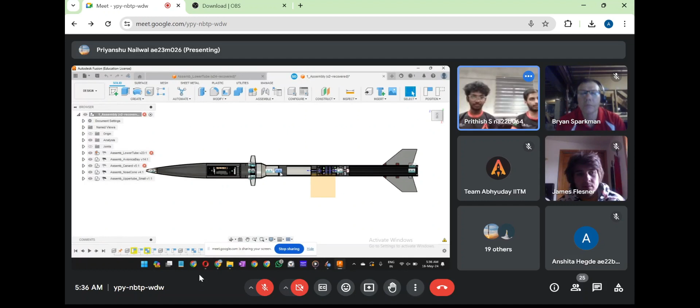So this is the cross-sectional view of this year's rocket, Chetak 2. As you can see, this time we are going with a minimum diameter at the cross section. Our payload takes a 16 centimeter diameter tube. It's a standard 3U CubeSat design, but the casing was thinner than that, so we decided to go with a thinner diameter to save weight, in which we succeeded. Another aspect we're working on is the canard system, so I'll brief you from the top of it.

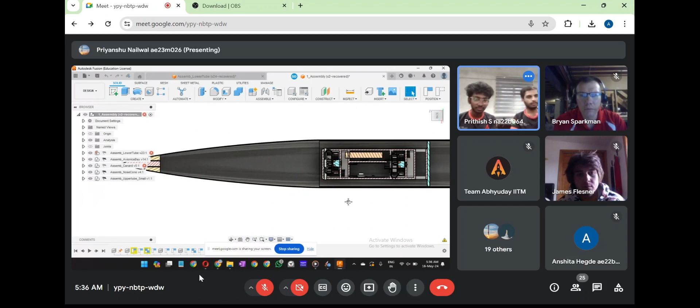Based on previous year experience, we went with an aluminum nose cone tip basic mechanism. The nose cone is a von Karman shape, with the fineness ratio set to 4 this year to reduce drag as much as possible. We decided to go with a carbon fiber nose cone; our nose cone and fins are both manufactured out of carbon fiber.

Our payload will be secured on a particular bulkhead, which will be fastened with the tubes. Below that comes a canard system, actually one of the most unique aspects of our rocket this year. The reason why we have a canard system is our last year's experience, so my teammate Prithish will explain more about it.

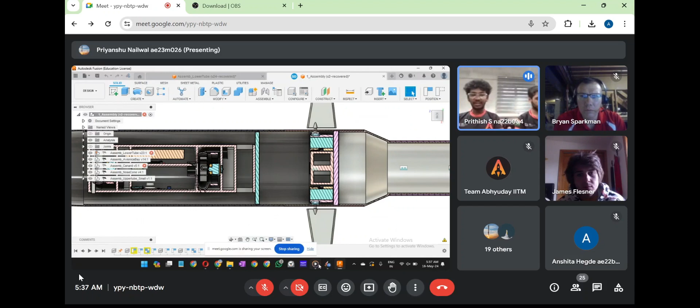So we thought of introducing aerodynamic roll control, for which we designed the canard system. It's just roll control. It's not doing any attitude, it's not doing any altitude, and it's not doing any guidance. It's just basic roll control.

The canards are basically flat plates with tapered off edges, positioned right before the transition so that there's no flow separation happening there.

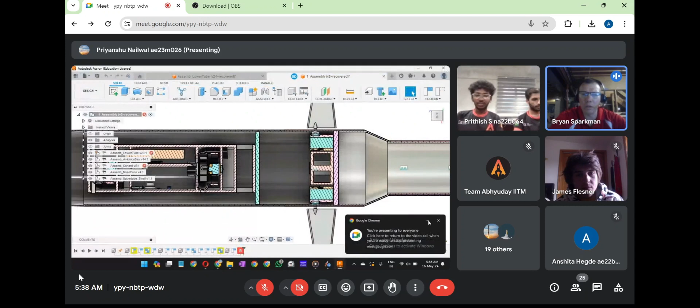Have you been able to test it at all? Have you put it in a wind tunnel or done any sort of testing, because I'm assuming you've done this with microcontrollers and servos.

Yes, but we haven't been able to test it yet because there's a small problem with the attachment of the canard that we are currently working on. The canards are ready, but once the attachment issue is sorted in a couple of days, we'll be able to test it out.

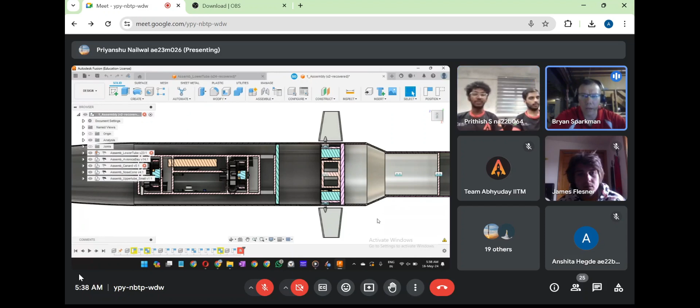That'll be something to cover in depth when you get out there, because we'll want to make sure those canards do what we expect and don't make the rocket go off the intended path. Especially if you're still working on the attachment method and possibly the code, take some time out there with the safety folks to explain exactly how it works to alleviate some of their concerns. Okay sir, sure. It's really neat, I like it. Thank you.

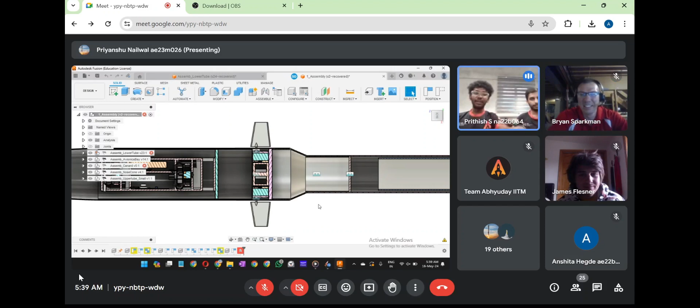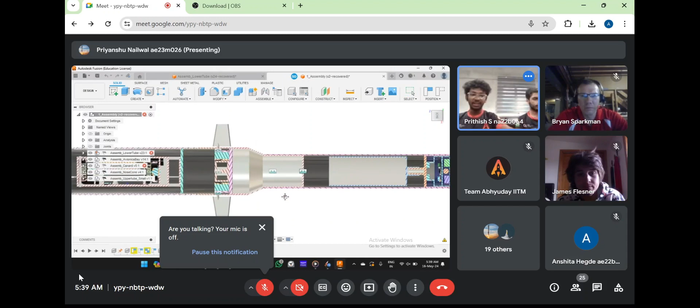Moving down from there, we wanted to try a minimum diameter rocket this year, so we included an aluminum transition, this part you see right here. Moving down, we have the upper body tube, which will house the piston mechanism.

In this piston will be our parachute, attached on a shock cord, which will be attached to the upper end of the transition, the lower end of the transition, and the upper end of the avionics bulkhead.

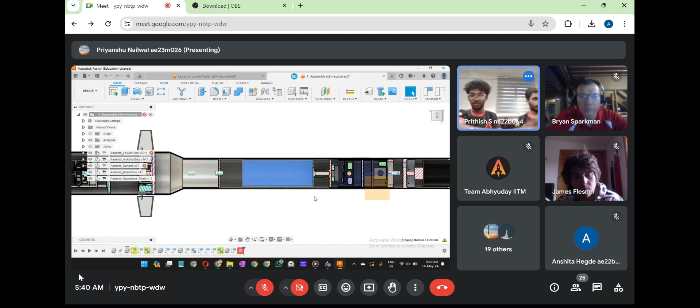Quick question while we're talking about the piston: is the airframe and the piston made of two different materials? Yes, the airframe is made up of glass fiber, and the piston is made up of aluminum 6061.

What is the tolerance between them? Have you figured out what I'm getting at? There is a 0.5 centimeter tolerance. So there's half a centimeter tolerance difference between the two - so there's no chance of it getting stuck because of different expansion rates of the materials. You've got enough clearance where it's not going to be an issue.

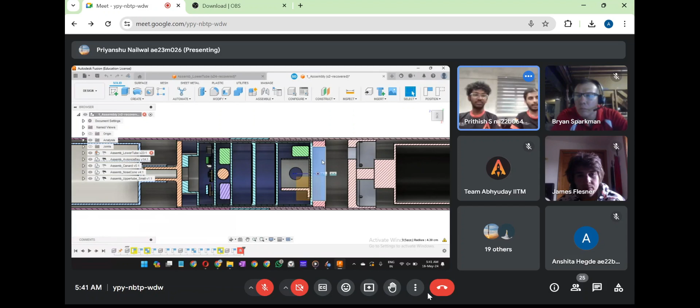Outstanding. Moving down, we have the avionics bay, which will house our COTS as well as SRAD avionics, and to cap it from below, we have the avionics retainer. A minimum diameter rocket has its own set of challenges, so we went creative with our solutions and decided to go with a retainer to join the avionics coupler along with this tube. The retainer is basically a big nut which allows easy assembly.

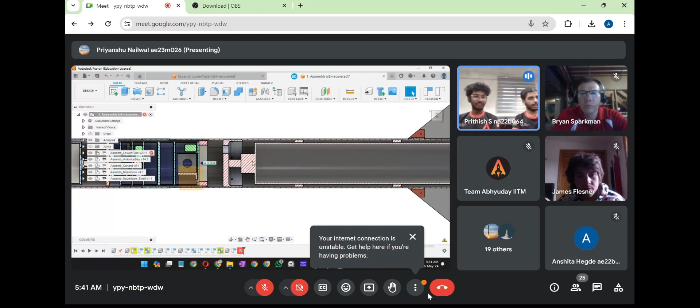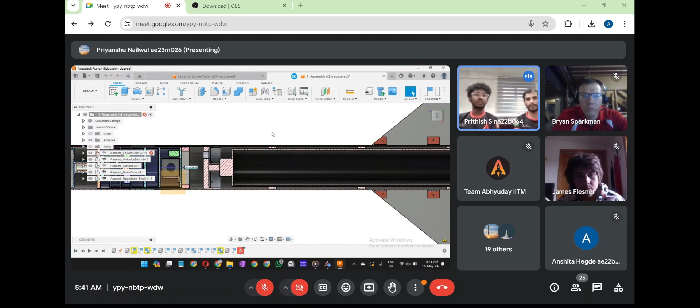Below this, basically we have our motor casing and the engine mount. The engine mount is aluminum 6061. We have made sure that it easily holds any kind of load. The factor of safety is more than 5 for the maximum thrust of the motor that we are using, which you can see.

And here we have fins. Last year we had hand laid up all the fins, but this time we are going with fin clamps in order to secure proper attachment. The thrust plate is here to make sure the motor rests on it and takes in the extra load that is there. It transfers the load to the body too. So this is the general overview of our Chetak 2.0.

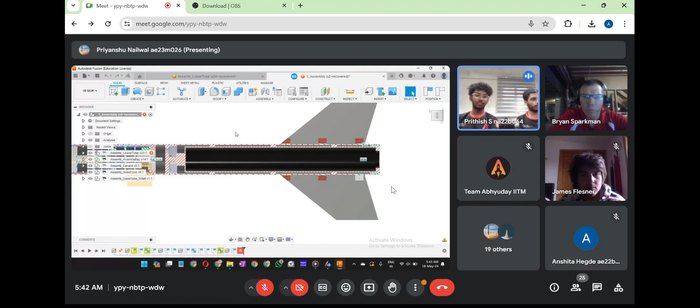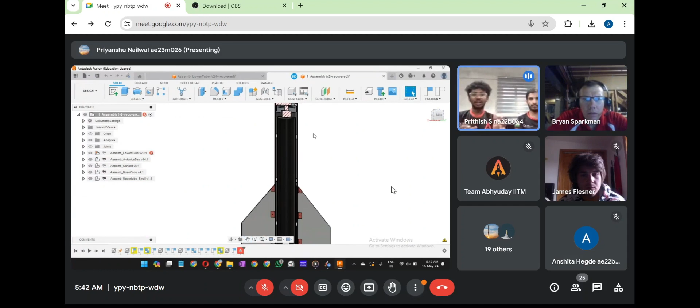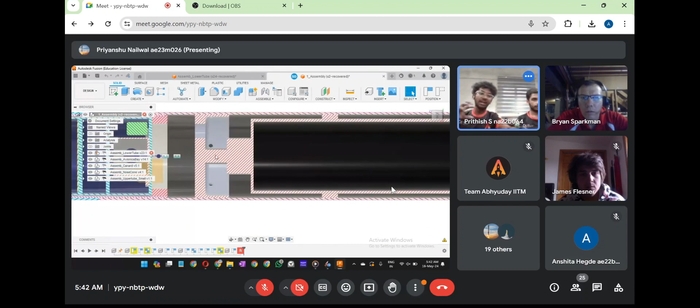How is the motor retained? The motor block has a protrusion at the center which is threaded, on which the motor would be screwed into. From the end, on the thrust plate, there's a cap on which the motor would sit when it's not producing any thrust.

There'll be a physical screw that goes through that bulkhead to the forward closure of the motor, and this is how it's capped.

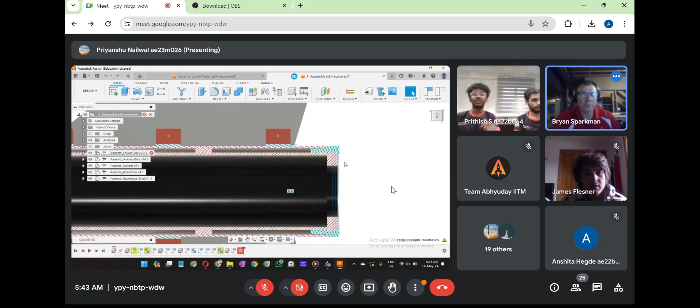All right, very good. Yes. We can show you the rocket right now. One second.

So is this your presentation, or do you have more to present? We have our rocket ready right now. Perfect, because what I want to do is go through a checklist of my own where I want to see the rocket and inspect it, and ask specific questions about the rocket that are safety related. Then we'll walk down the list, and if you could bring the rocket pieces we're talking about so we can discuss them in depth. Is that okay? Sure, sir. Yes, perfect.

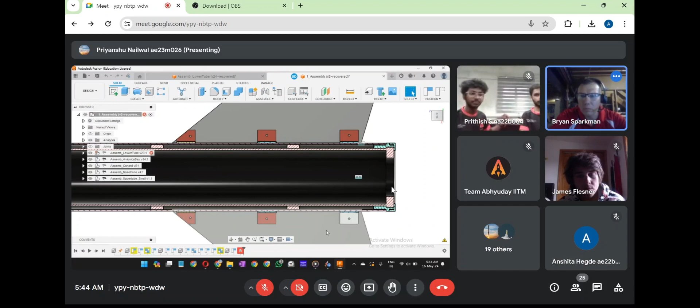So let's see if we can just go from top down. Can you show me the nose cone? I hope that is visible. Oh, I see it, hang on. I gotta get it to where I can see it. I'm struggling to get the one... there we go. I hope you found that. Yep, I found it, okay cool. I was trying to maximize that window so I could see it better because it was really small. Yeah, you can pin it. Okay, so I see the nose cone.

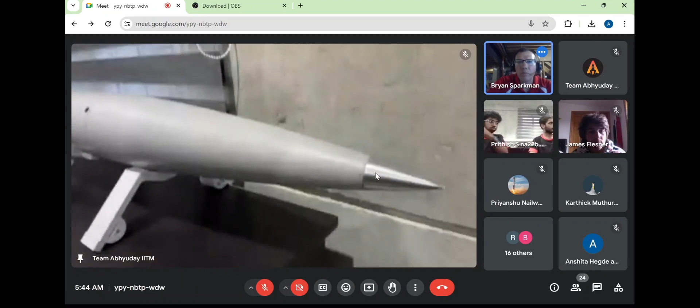Can you talk to me about the separation point? Where does it separate there? So the nose cone does not separate, it's a permanent fixture. The separation happens here at the transition.

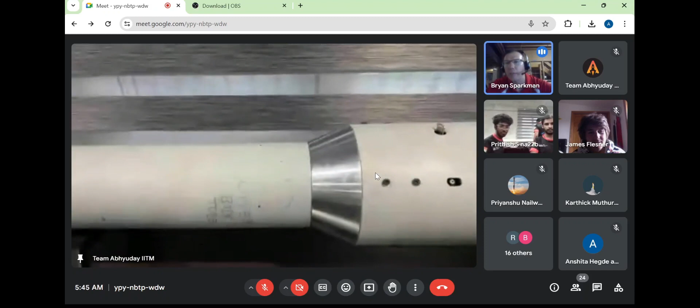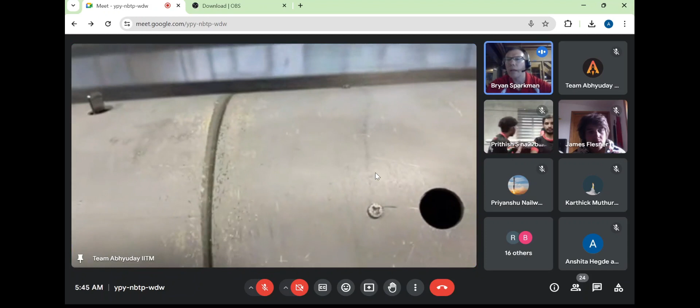Okay, yes that's right. So how is the nose cone held in then, is it shear pins, is it bolts? No, the nose cone is held to the payload using bolts, it's M4 bolts, and then the payload is attached via M3 nut and M3 bolts here. Then there's a canard spare, again attached with M4 bolts here, and the transition is permanently fixed using M4 again.

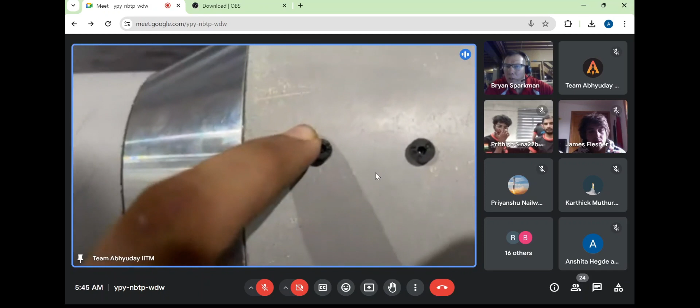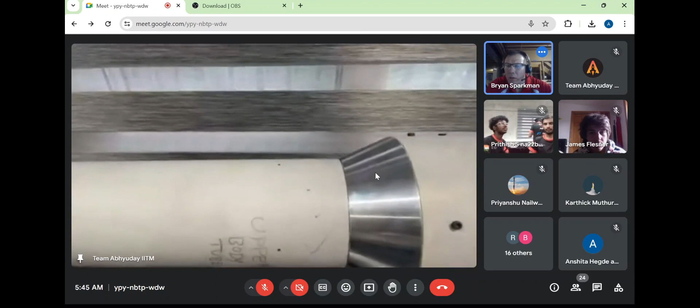Okay, then here is where we have the shear pins. Here will be where we'll be having shear pins. Okay got it, what size are those shear pins? Are they, uh, M3 440. 440? Okay, big ones. How many do you have? Four of them.

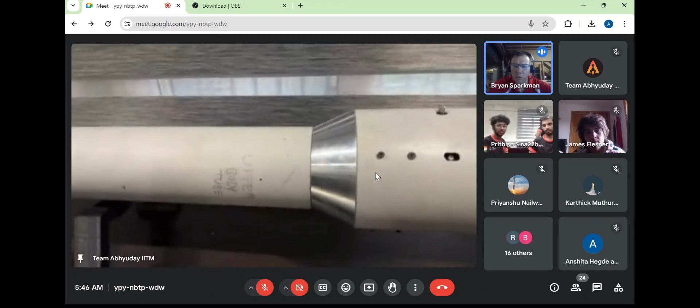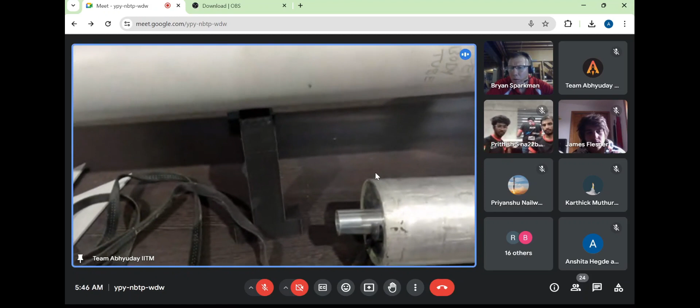Have you done a separation test on that with the piston system? We are planning for next week, right now we are working on the complete assembly. We have done testing on the old rocket with the same piston system, but we haven't done it on this one. Remind me, the piston system, is it black powder or is it CO2? It's a black powder system. We have a small combustion chamber, as you can see in the piston system, this is where we generate the pressure using black powder, and the piston shoots out.

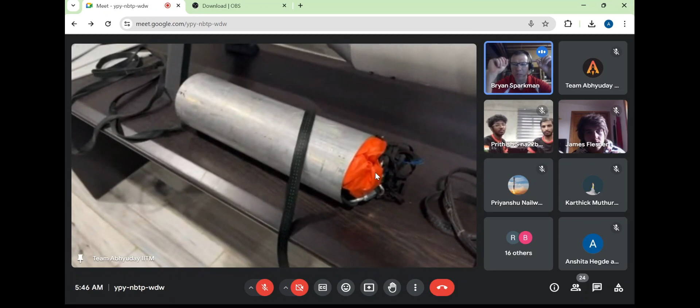Okay, very good. This is a piston system, so the four 440s are probably a lot, but you have a piston system, so I'm less worried about it because piston systems are usually better about getting the force necessary to separate. So I think you're good.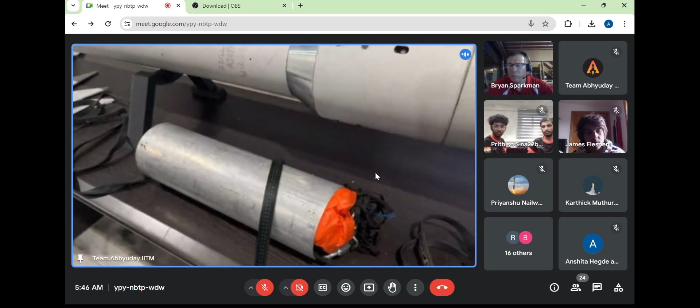So yeah, we have kept more than a safety factor of 2 for the force required to break the shear pins, considering that.

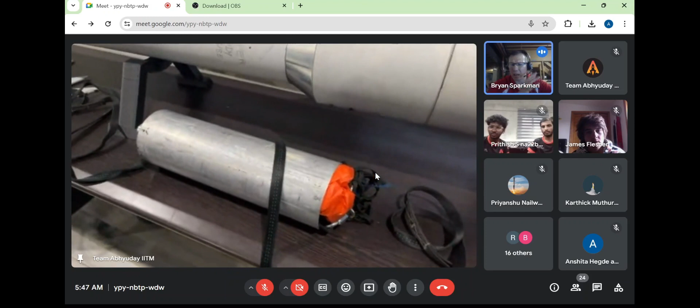Talk to me a little bit about the load tracing for your payload, because your payload is like 8 pounds, I think that was the requirement. It was something in there, yeah, 8.8 pounds.

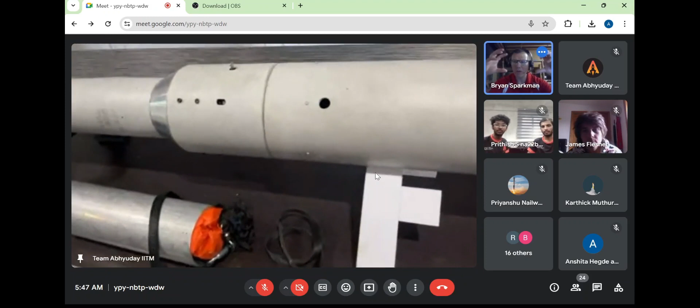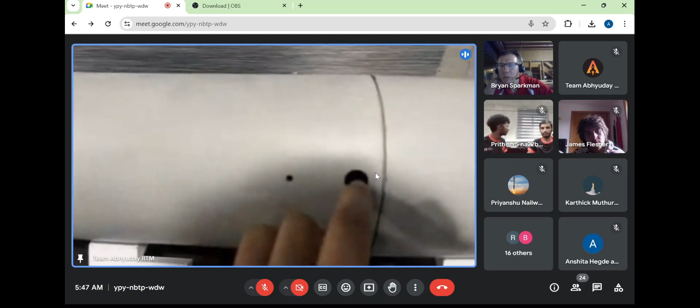Is it held together just by those screws I saw earlier? They looked small for 8 pounds. So we have 6 of them to retain it in place. Also, as you can see the big holes, there'll be a duct kind of thing attached to this permanently, which is also attached to the payload. So the payload will also be hanging from that, to ensure the load is distributed between the duct system and the bulk.

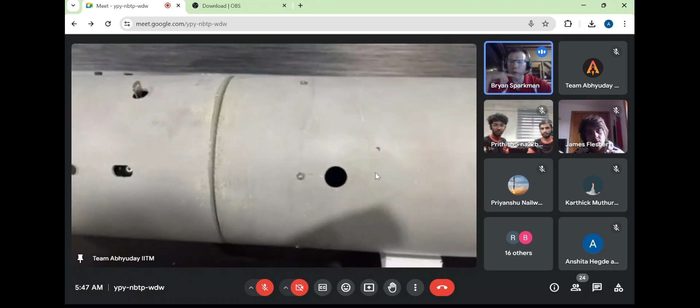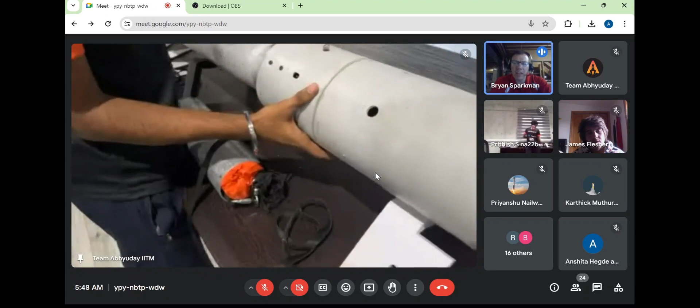Are you able to open it and show me? You'll have to, because what I'm thinking about is when your main parachute comes open, the G load is really large.

It can be as big as 50 Gs, even bigger sometimes. So if you think about this 8 pound mass moving down, it suddenly has to be stopped very quickly - that's a lot of force. I want to make sure you guys are thinking through the load tracing so nothing breaks free. Does that make sense?

Yeah, that's the reason we went with 6 screws. The 6 screws were actually an overkill, but that's the reason we went with 6. They look pretty small, but it depends on how it's done. So the bulkhead is - I'll try to remove the screws right now and show you.

Have you thought about this force on the screws and the airframe itself? Sometimes what I have seen on rockets similar to this is when that parachute opens up, the force is so great it will tear a hole, like a long slice through the body tube.

In this case, it looks like you've got your payload actually attached to that bulkhead, and I see a big ring on that bulkhead. Yeah, the payload is attached by an eye bolt to the bulkhead, and there's no other connection with the airframe in this.

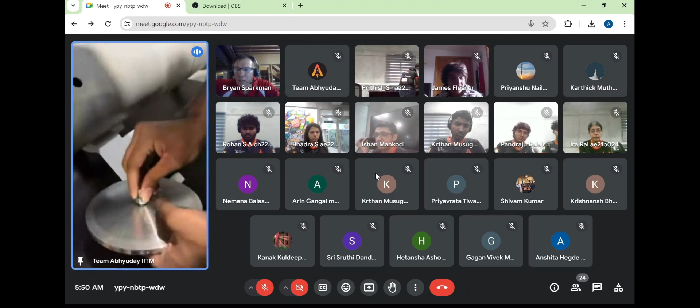It looks good, that's what I was thinking. So we don't have the payload right now, but it'll be attached to the bulkhead using a nut and a locking washer.

Very good, that's what I was hoping. So those screws are just holding on the airframe and nose cone - not really a huge load, mostly just there to keep the airframe from falling off. Most of the load is being transferred through that bulk plate and that bolt.

And about the thickness of the bulkhead - the actual thickness required was very low, but as we couldn't drill holes in a very small bulkhead, we chose to increase the size of the bulkhead just to be sure on the loading, keeping the safety factor very high.

So after this, we have the canard bay here. Is that your SRAD, or independent of your SRAD computer, or does your SRAD computer also control that? No, it's a completely independent system - it has its own flight computer, as you can see the PCB.

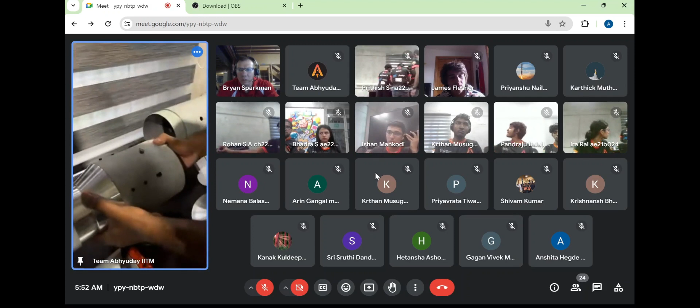It also has the servos inside right now, you can see in the back. I'm not sure how is that powered? I'll have to remove the transition - we have a battery. No, I have to remove the screws. You have to remove the screw.

Hopefully you saw the announcement about lithium polymer batteries. Yes, so we are using lithium-ion batteries in metal casings. I think that was permitted, correct? Yeah. We were initially using lithium polymer, and then the new rule came up, so we shifted to lithium-ion batteries for everything.

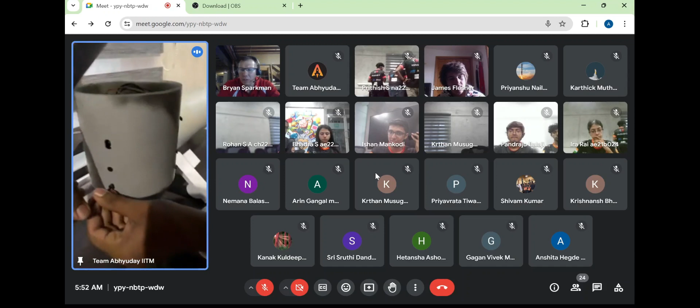Great, yeah I think that's because of the heat, it's very hot out there. Yeah, and in case the parachute fails, there's a good chance it might catch fire.

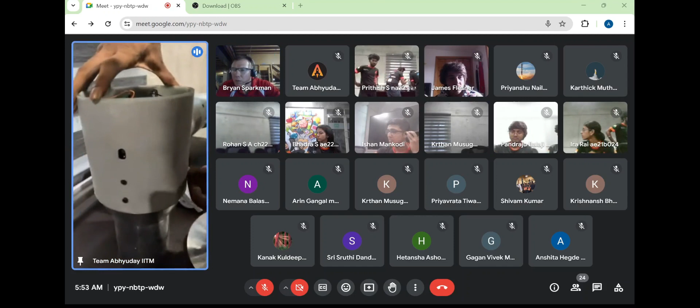We ensure that there are enough screws so nothing comes out, just in case during the stress of flight, everything stays secure.

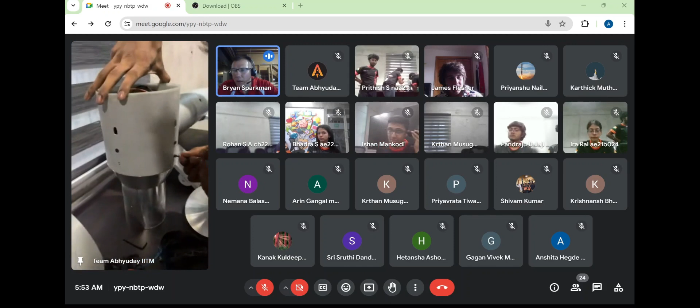Is the nose cone held in a similar way? Yeah, for the nose cone, there are again M4 screws attached to the payload bay, and then the coupler inside that nose cone. This coupler has been permanently epoxied to the nose cone because we didn't need to separate it at all. So this has been epoxied, and then we have this system.

So we have a battery casing. If it's visible, the wires are not done yet - we'll be soldering everything. This was a temporary fixture, but if you can see the batteries - yes, I see them - very good. So the battery casing has been screwed in along with the system so that it doesn't come loose.

Not able to show it properly, I think.

This is the system from inside. So we have a PCB, we have a key switch to trigger it on and off on the launch pad, and we have four servos. The canards have not been attached yet.

We have the canards separately here, all four of them. The canards are also aluminum 6061 considering the loads and the attachment mechanism, so we didn't want to go with composites for this.

So the transition section is also completely hollow from inside, and we'll be having U-bolts. We haven't drilled the holes for the U-bolts yet. We'll be attaching a U-bolt on this side with a swivel link and a quick link, which will be attached here. The parachute will be hooked via a shock cord to the quick link here.

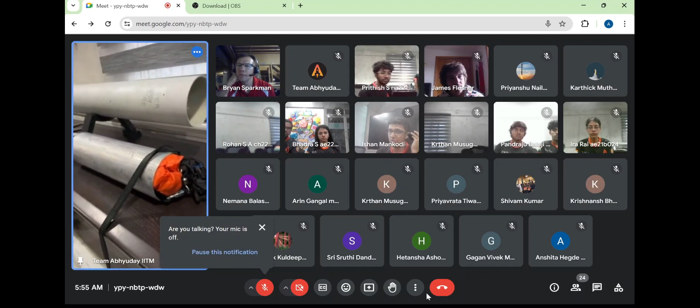After that, we have the upper body tube, and the upper body tube will store the piston inside it. We did all the fit checks and pull checks so that we are sure the parachute deploys, it doesn't get stuck inside the piston, and the parachute easily comes out.

The parachute right now is completely loaded with two reefing cutters for redundancy, shock cord inside it, and the necessary wirings that go with the reefing cutters. Coming to the back of the piston, we have a slot here to ensure that the shock cord has enough space to wiggle around when the system is deployed, because the second end of the shock cord will be attached to the avionics bulkhead using an eye bolt and a quick link.

You said quick link? There'll be an eye bolt and a quick link? Yeah. How big of a quick link? I can show you the size - so we have two sizes right now, these ones are the smaller ones. Oh, that's sufficient, that's great.

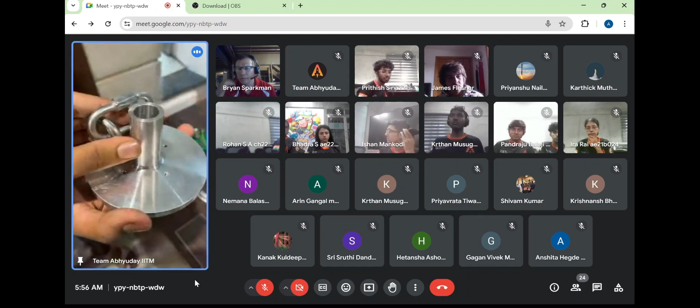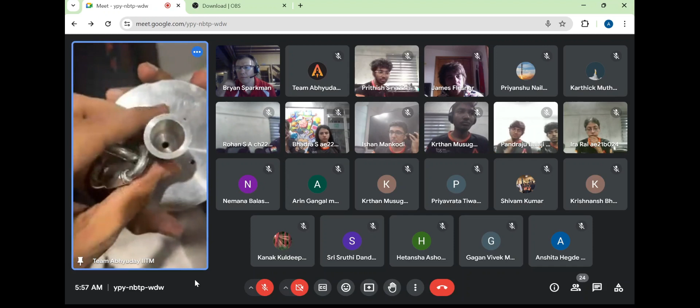This, by the way, is the avionics bulkhead. We'll be epoxying it to the avionics coupler, which I'll show you next. And this is the combustion chamber in which the black powder will be loaded, along with three e-matches - two controlled by two different COTS, and one controlled by the SRAD.

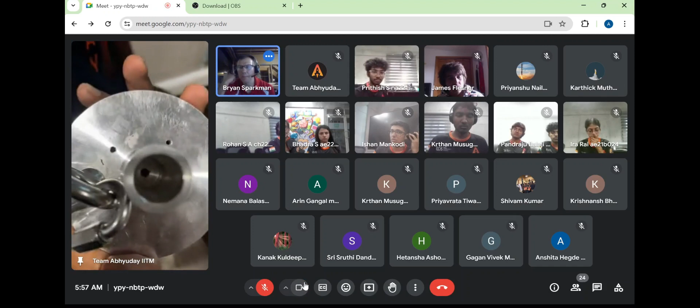I saw that, I have questions about your SRAD but we'll get to that in a minute. Sure. Are you plugging that hole so the black powder doesn't go - so the force of ejection doesn't go back through that hole? Yeah, once we have the igniters through them, we'll be plugging that hole. We'll be filling that hole with quick 5-minute epoxy.

That'll probably be sufficient. After that, this is the avionics bay with switch band. The switch band will have holes for two different key switches to trigger the SRAD and the COTS separately.

After that we have the lower body tube. Do you have a switch for each altimeter? Yeah, so for both the COTS we have one switch key, and for the SRAD we have one key switch. What batteries are you using for your COTS altimeters? The primary battery is 9 volt - there are two 9 volt batteries for independent COTS, and one 3.7 volt lithium ion for the GPS tracker.

Moving on to the lower body tube, we have the motor mount inside, which is screwed using six M6 screws. For safety, since it's a permanent fixture that doesn't need to be removed, we have also filleted it with epoxy inside. Because sometimes those screws can tear through your airframe, having an epoxy seal is much stronger and much safer.

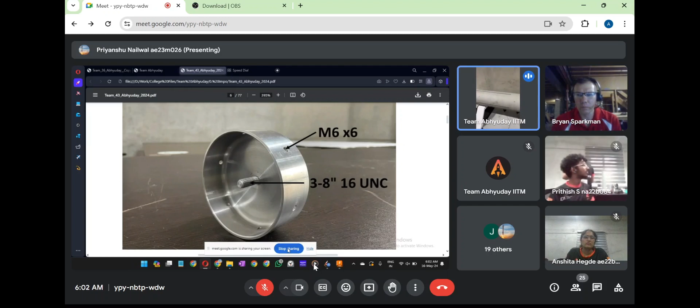Very good. So moving on to the fins, we haven't fixed the fins yet because there was a delay from the manufacturing end of the fin clamps. We just got it yesterday night and we didn't want to rush it in for the presentation because we wanted to ensure the fixtures are proper. But we have machined the slots on the body tube where the fins are supposed to go.

These are the fins - carbon fiber fins, coated with primer right now. How thick are they? These are 4 millimeters thick. Okay, very good, that's plenty. So moving to the clamps, these are the clamps.

So we have 4 pairs, 8 pairs of these, 2 rows basically of straight clamps, and we have triangulated clamps at the top. These clamps are 2.5mm thick. They were modeled based on 6061 aluminum, but due to availability and increased strength requirements, we went with 7075 aluminum, which has almost double the strength of 6061.

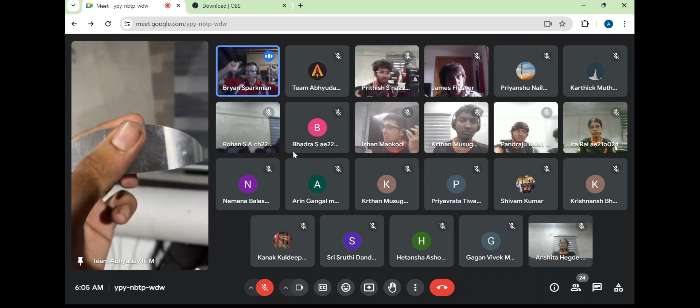So one thing that comes with having a transition is the rail buttons. We have protrusions that come up on the body tube, and we've ensured those are aerodynamic enough. One protrusion will be attached directly to one of the clamps, and another protrusion will be attached to the upper body tube, with rail buttons on both. The idea is you've got an offset so one rail button sits up here and one down here, and they line up in one line.

I think you got it wrong. This one is on the upper body tube, not on the lower body tube — the upper body tube is the same diameter as the lower body tube that houses the piston, just before the transition.

Show me your separation point again. Can you fix it? So your launch lugs — you don't have one on the larger body and one on the smaller body, they're both on the smaller diameter body. That's better. This was to ensure we have enough gap between the bodies and to avoid manufacturing errors — changes in diameter that can't be predicted during analysis, like what the final diameter will come out to be. This was chosen to ensure uniformity and make the launch easier there.

Moving on to the avionics. This is the avionics setup — a 3D printed bay which will go inside the avionics coupler. The first thing is the battery holder, which holds the lithium-ion batteries that we talked about.

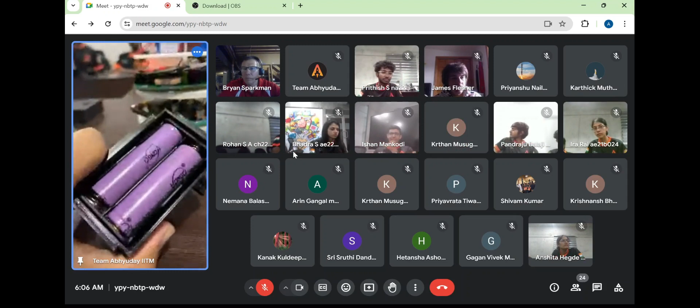What batteries are those? Lithium-ion batteries, metal case. Sorry, I can't hear anything. Am I audible? Can you all hear me? We can hear you, sir. Am I audible? Can you get some other phone? Can you talk and say the field request? Hello, yep, can you give— I'm not sure what that was. Am I audible now? I'm losing video. I'm changing the camera, it should be visible now. I've changed the device, if you can see it'll be on another device. Sorry, I'm trying to get the window maximized. Okay, I see it now. Can you guys hear me? I still can't hear anybody. I hope it's visible now, sir. Yep, I can hear you now and I can see it. Okay, sorry about that.

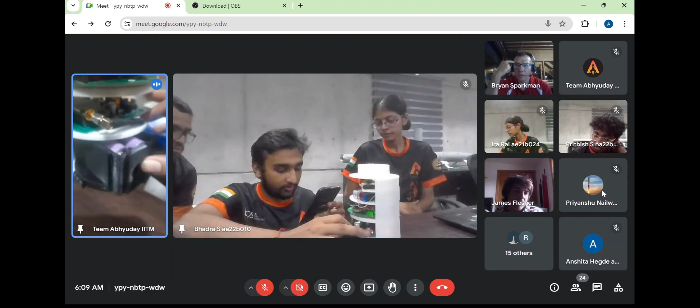Where are those positioned in the direction of travel? Is it the same direction as those springs, or is it normal to the springs? They are normal to the spring, so the direction of travel is normal to the springs. The battery holder goes in this direction inside the bay, while the travel is in this direction. It's perpendicular, I would think, but I don't know for sure. I would check the guide.

If I had to change anything, I would change the mounting of those batteries. That may be a question, and they may send you back to fix that before they sign off on your safety review, because I don't think I've ever seen anybody approve batteries held like that. Okay, so we'll reduce the risk - we'll just solder the connections to the batteries to reduce these kinds of risks.

So after that, we have the power distribution board here, which has the antenna for the telemetry as well, the SRAD telemetry. The board has been wired.

Have you been able to test the SRAD? Have you had a flight test? What kind of testing have you done on the SRAD? That was one of the things I had questions about on the last report. As of now, we don't have flight permissions in India, so we couldn't fly the rocket. But we have done ground testing on the SRAD computers, using lifts to see the altitude measurement and to see if the ejection system works fine. But we couldn't do the flight.

But we have done the vibration testing on the PCBs. In the aerospace department, we have machines that can simulate the vibrations of rocket launches. So we have put them through vibration testing to ensure there are no loose connections, or no chance of connections coming out during the flight.

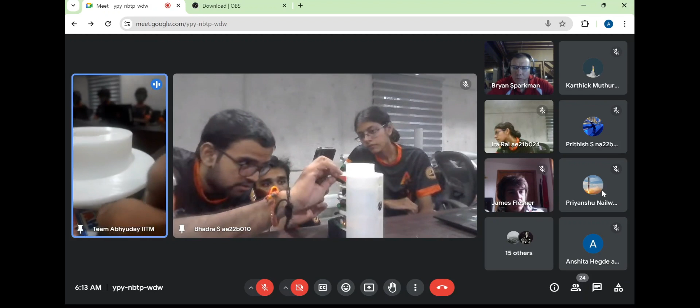We also have a COTS telemetry, which is a GPS tracker, which you can see here. The GPS tracker is a featherweight GPS tracker. We also have the ground station for that. This is a redundant telemetry system in case we have any failure in the GPS coordinates, so that we can accurately recover our rocket.

So you said that has multiple addresses - you mean multiple frequencies on your SRAD? We're using only one, but we can set it according to the code. What frequency band? Is it ham radio, like 400 megahertz, or 900 megahertz? It's in the 900 megahertz range. And you have the ability to set it to just one frequency, right? Yeah. It's not spread spectrum and hopping or anything like that? It is using a LoRa protocol, so it's slightly spread spectrum, but not quite - it's not using like 60 channels or anything like that.

No. Okay, very good - that'll be one of the requirements. I mean, you remember from last year probably, but they'll give you one or two frequencies, and you have to stay on those frequencies.

The 900 megahertz band is usually very crowded, so it's important that all the SRAD systems stay on one narrow band, one frequency and a relatively narrow bandwidth.

What is your bandwidth that you're using for LoRa? We are using around 250 kilohertz. Make sure you tell them that, because I think they have 100 kilohertz slots for each team. We can control that in the code, so we can adjust it accordingly. For testing purposes here we use 250. I've seen other teams use 500, and that's a lot of bandwidth.

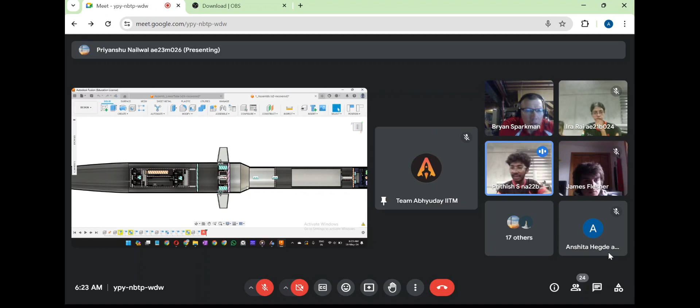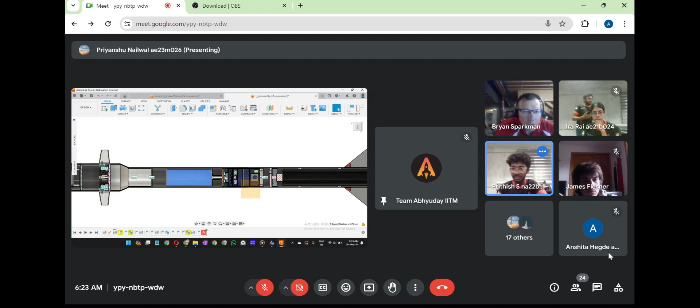So the payload is right below the nose cone, like in the shoulder of the nose cone, then followed by the canards bay, and in the upper body tube we have the piston inside which the parachute would be kept, below which is the avionics bay.

So where does the parachute attach? Where does the shock cord attach? The shock cord will be attached to the avionics bulkhead on one side - I'll show that. In the video you can see an eye bolt with a quick link on which one side would be attached. The other side would be attached to the top at the transition, where we'd have a U-bolt, a swivel link, and a quick link which will attach the upper shock cord.

But I'm trying to think about the load - the force on how does the force from the shock cord get transferred to the motor? Is it through the avionics bay? Yes, it is through the avionics bay. And the avionics bay is made of plastic. No, sorry, it'll be through the body.

So the avionics bay is epoxied to this avionics coupler over here, which will be screwed. So the load transfer happens through that - through the external screws that go into that plate right there, where the piston fits into. Yes, this plate - so that plate is just bolted into the airframe? No, this plate is epoxied to the coupler, and that coupler down.

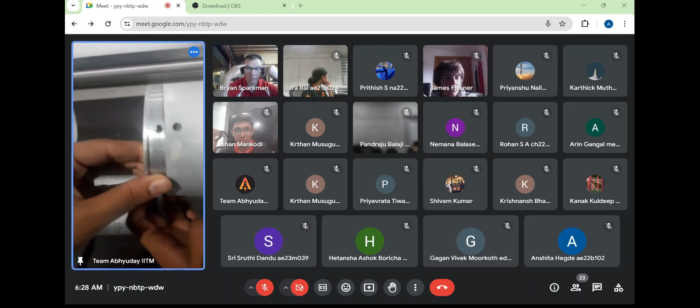But then that can still slide out, so how does it not? The holes are not drilled yet, but as you can see there are 4 holes here, and the retainer ring, the one I showed earlier. Similar holes will be drilled in the upper body tube, and there will be 4 M6 screws that go through it, which will permanently attach the avionics coupler to the lower body tube.

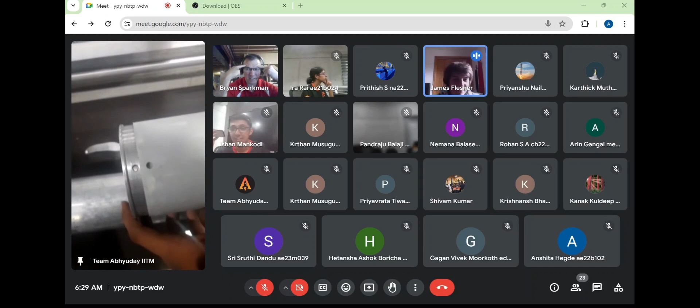James, do you see what's going to happen? Are you seeing what I'm seeing? It could just rip straight through that. It's gonna rip straight through that fiberglass when the main opens, and the back half is gonna separate. Is that exactly what I was thinking? Is that what you're thinking? Yeah.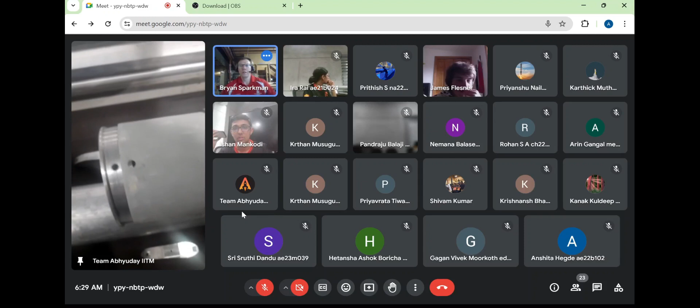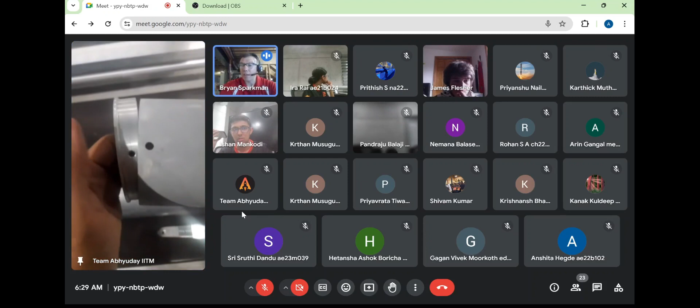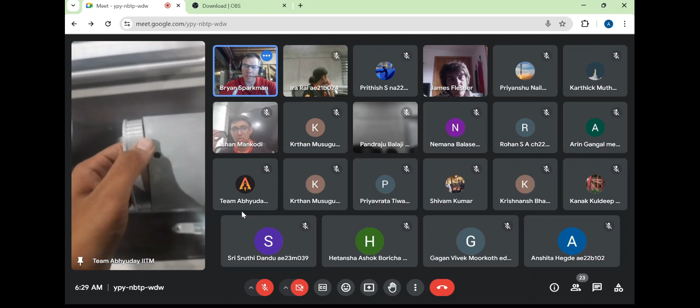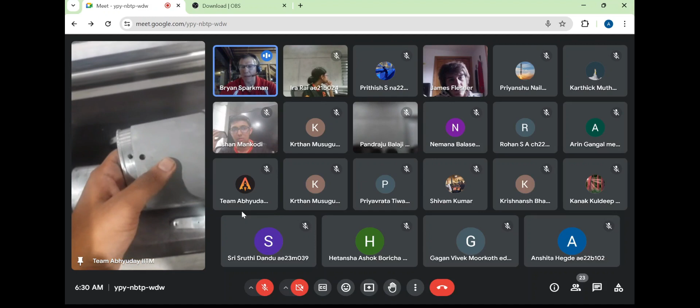So team, do you understand what we're saying? I think you're afraid the 4 M6 screws attached to the airframe might just shear off, but I think they're going to stay right there. What I think is going to break is the hole in the fiberglass, because those holes are transferring the entire load of the lower half of the rocket to the parachute. You have like 3 to 4, maybe 5 millimeters of fiberglass at the back end of that hole, and that's it. If that breaks, the whole section's going to come apart and your motor is going to fall.

You'll have everything under chute, but your motor part is going to fall out. Do you understand? Yeah, yeah. So what we can do is replace the retainer ring with a structure that comes extended out and epoxy it permanently to the body tube, with the avionics bay resting on it. So do you need that back half section to come out? Because I would almost say epoxy and then screw in that section and just make it permanent. Do you need to be able to get in there?

So our plan right now is to epoxy this bulkhead, so we'll need access from this side. Oh yeah, I see what you're saying. That's a tough one, we might have the same problem if we screw this bulkhead.

You're exactly right. We had a similar mechanism last year where we had four M6 screws on the body tube, which fixed the avionics coupler, and there was not even a little damage to them during deployment. It's really thin from my perspective, and I'm just worried that you've got your motor case, all those big fins even though they're carbon fiber, the lower airframe, all those metal components in the back plus the motor, and that's going to be pulling on those little spots. We don't have to solve the problem right now, as long as we've identified the problem.